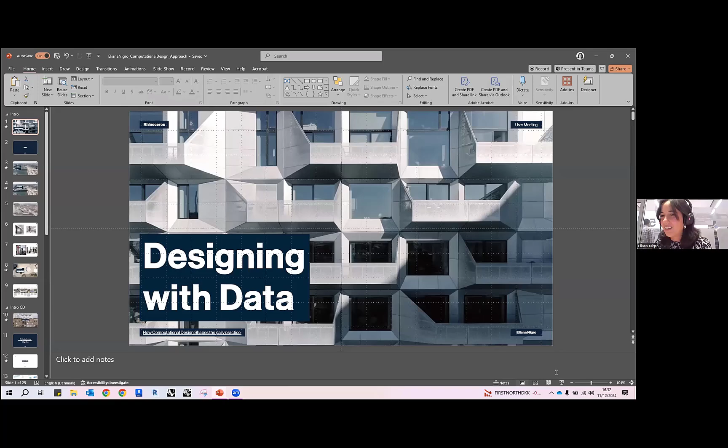All right, perfect. So you can already see, you have already a bit of a spoiler. Just let me know if you can see my screen. Is it okay? Yeah? Yes, okay, not perfect, maximize, but yeah, now it's okay, perfect, great. Here we go. Thank you.

Okay, so you already said something about me, so that's great. And today we are going to talk about designing with the data.

But before diving into the nerdy stuff, I want to tell you just a tiny bit about who Cobe is, because part of the digital approach is actually reflecting what we believe in, what our values are. So, who Cobe is in a few numbers, and I promise this is going to be very short.

We are an international hub of around 170 people. The company is quite young, born in 2006. But despite that, we work all over the world in different scales, and our built projects are in more than 10 different countries. We are located, as you can see down there, in Copenhagen, more specifically in Nordhavn.

This is a place that is very close to our heart since we designed this entire part of the city. So we can say that we are in a one-to-one laboratory. We are literally on a construction site, and around us there are so many spin-off projects that we made. Some of them are quite famous, like the silo.

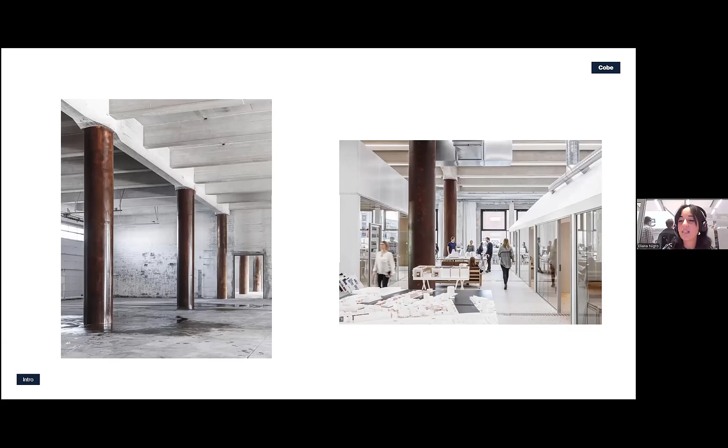So here you can understand that when we work in any context, we want to be respectful. We want to be rooted in that reality, but at the same time, bring something different in. For example, at our office we have a cafe, and you wonder, why are you talking about a cafe? I'm not sponsoring that, we don't get money for that. It's just to say that we want every time, even if it's just an intimate private office, to have the public come in, to create an attractor and to really create the change.

We don't work only with architecture, we work also with urbanism and landscape. And if you look at our portfolio, it's actually much wider.

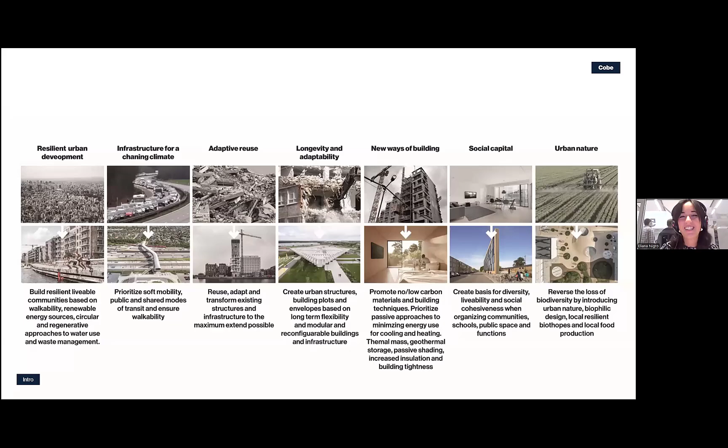So we also do infrastructure, for example, a lot of bridges and stuff like that. And going closer to computational design, we want to be future proof. We want our designs to be long lasting, durable. And if you think of working in a smart way with scripts, what's a better future proof workflow?

I mean, you are basically reusing some parts and working faster, efficiently. I'm going to show you some of these things. So here at Cobe, as I said, I'm the head of computational design. That means I am doing all the planning, development, integration, and knowledge sharing of computational methods.

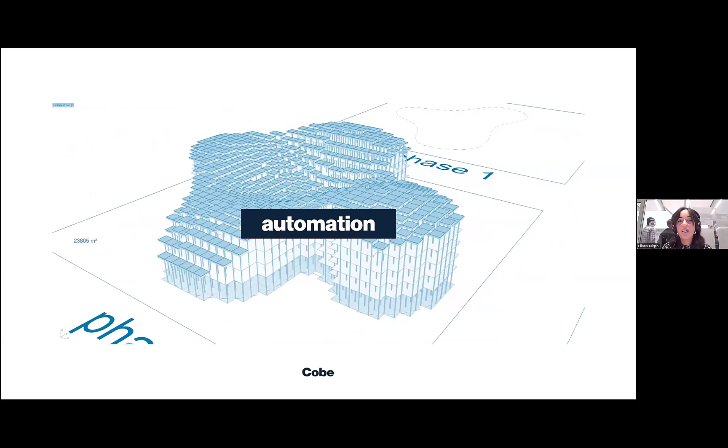One thing that we truly focus on is automation. We want to remove as much as possible all the repetitive, machine-like tasks. We don't want to sit and do a lot of heavy clicks, but we want designers to do what they can do best, which is focusing on creativity, on strategy, and truly coming out with the best solution possible.

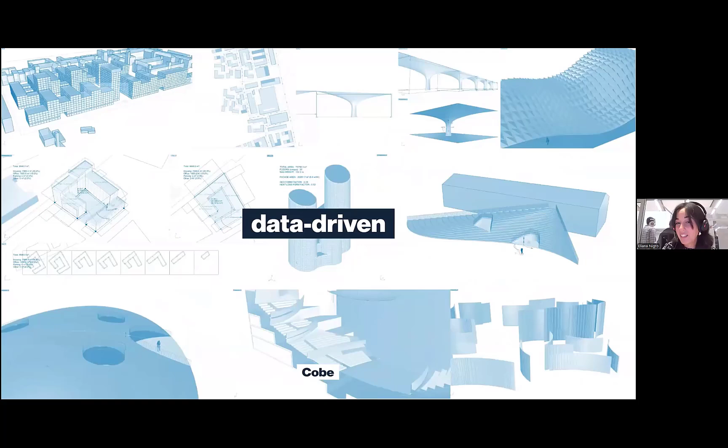Of course, it's not just about repetition, but even more importantly, about understanding what we are doing. So every time we work, doesn't matter what it is, doesn't matter the scale, we extract the information we need. We make sure we are on target for our clients, but also, and even more importantly, that we are meeting our sustainability goals.

So we constantly look at the qualities, the aesthetics, but also at the quantities. That's so powerful, because when you communicate with numbers, the guesswork gets out of the equation. That means that even if we work across different disciplines and don't have a unified style, we have a large portion of tools that can help us with, for example, simulations.

Like in this case, we are looking at the sunlight analysis with Ladybug. Doing all these things actually allows you to be a bit more certain about what you are coming out with, about your ideas. You can truly, in this way, make sure that you're leaving a positive mark on society.

And what we do here at Cobe with computational methods is always making sure that our tools are very intuitive. So we build interfaces. I don't mind sometimes sitting with the people and actually understanding the way they want to work, the way they get creative, because the tools should truly reflect that. So sometimes we change the inputs or the interface so people can feel comfortable.

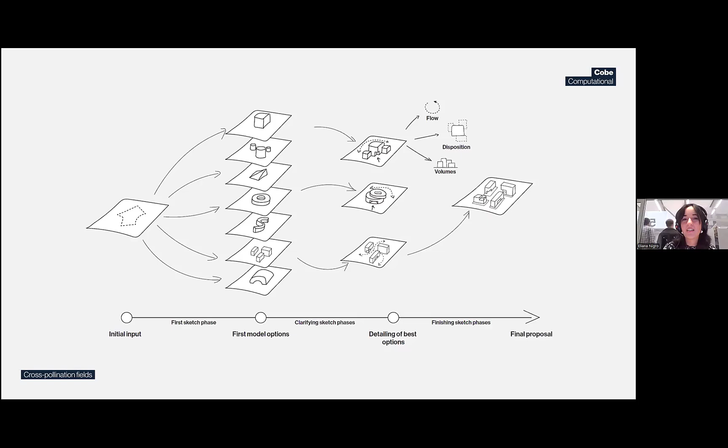I just want to say, in a small parenthesis, that even if I'm so much in the digital process, I do believe, and Cobe believes, that the physical world is equally important. So we do a lot of models and we bring them into the room. We look at it as a team. And we can cut it and glue it back together.

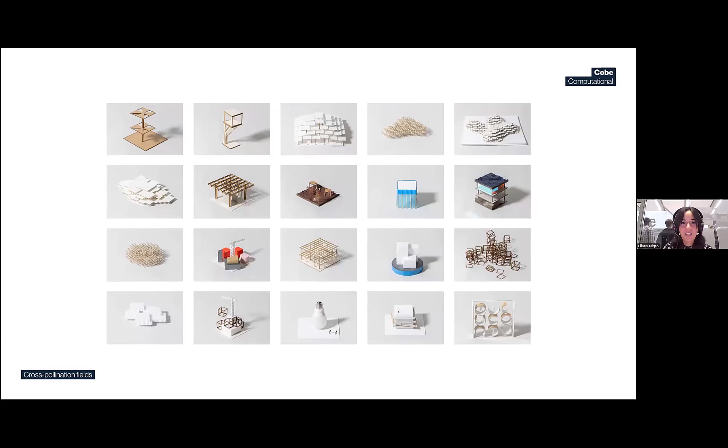And that's quite interesting to see. It's a different way of being creative. And then we can take that knowledge and build a new 3D model.

We also explore AI solutions. We also believe that some solutions out there are actually very good to spark new ideas or to test out some design solutions a bit more quickly.

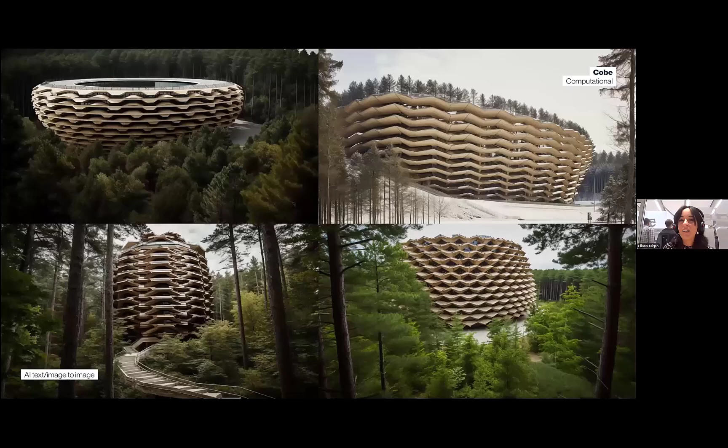We are actually very open-minded, and we do know that the toolbox of the architect at the moment is ever changing. And we are integrating AI also for expressing some abstract concepts a bit more clearly.

So just to say that what you are going to look at today is just a tiny part of what we are doing. Now I'm going to switch to this other presentation, because we are going to dive specifically into one project. I'm actually doing something I think quite unusual, because I'm not presenting a sexy, complex shape. I'm going for urbanism. I decided to present a project I love very much. We won it recently, very proud of it.

It's located in Hamburg. It is actually an entire district by the park that combines different functions. I will not dive into anything related to the design, but we have a fantastic website you can check out.

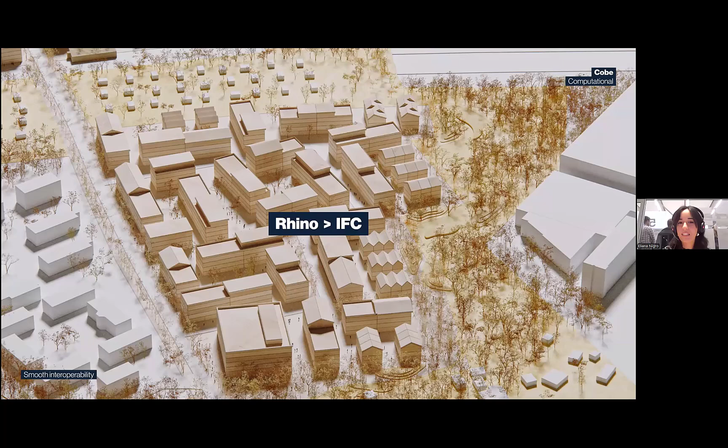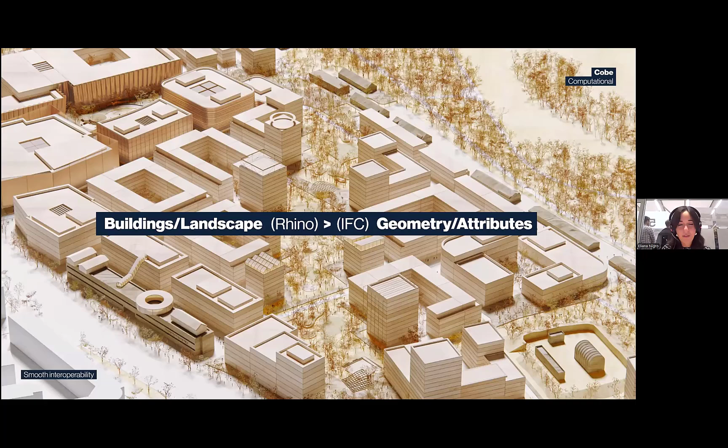I'm just going to talk about the BIM challenge that we faced for this project. Since the very beginning, with the first phase of the competition, the client wanted us to deliver IFC models that were incredibly detailed. So in this case, we are working not only with buildings, but also with the landscape. And the IFC is not just made of dumb geometries, but all of them are proper BIM geometries with a lot of attributes attached.

So how do you nail that in a very limited time and with such a scale? We are talking about 55 hectares of terrain to design and 630 more thousand square meters of buildings. Just to make it a bit more clear, we have more than 300 unique buildings. That's a lot to design, to think about, and even to deliver with such precision.

To make you grasp the amount of quantities that we needed to extract, you can look at this. This is the Excel that comes out of our IFC. So there is truly a lot going on.

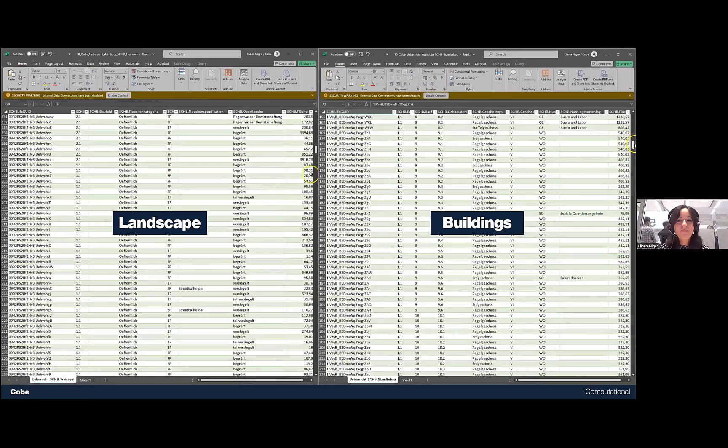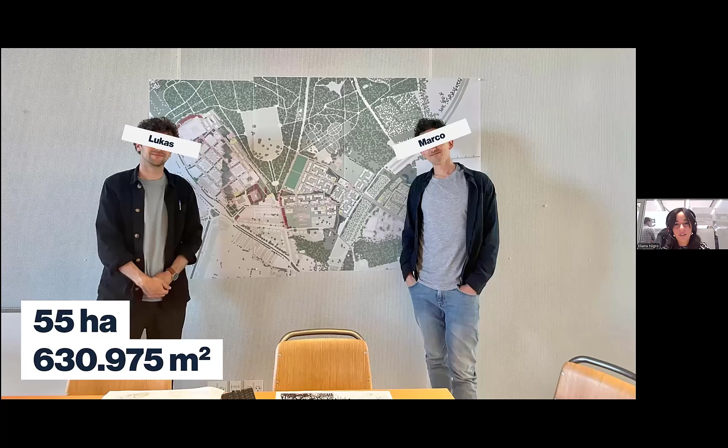This, I have to say, wasn't just thanks to computational design, but also the fact that there was amazing teamwork. We were quite a tight team when we started, and we truly, since the very beginning, talked about what made people comfortable, how they wanted to work, what the inputs should be. Therefore, they could focus on creativity and we could handle the very last part, the digital delivery, just in the last few days. So how did we do that for something so large?

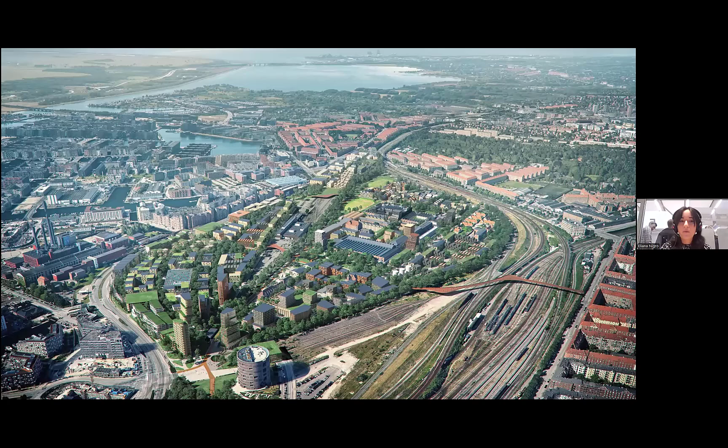I want to make a small parenthesis again, just to say that we work very often with these numbers. This, on the right, is Jernbanebyen, another very famous project of ours, a district in Copenhagen. It has even a higher density. So we are used to dealing with this scale.

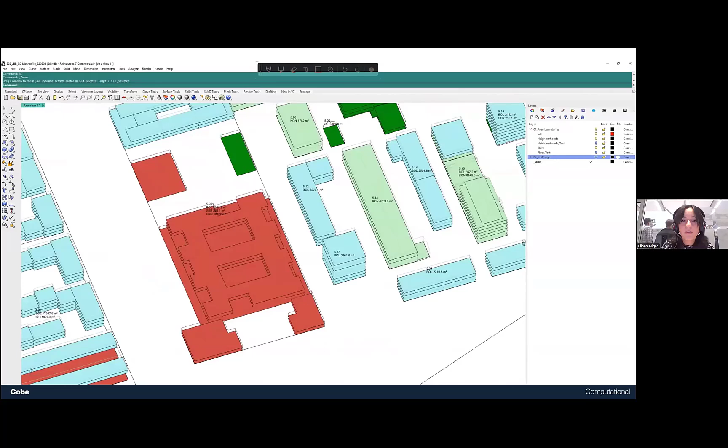Every time we work in real time, we need to know the quantities. For example, in this case, you can see, and this is just something super simple, it's just areas by function, but it is important for us to know what is the amount by neighborhood or by plot. So we are used to having this information on our screen.

So even if we are working with just one building, very simple, we can just feel free to play around. And even if we do drastic mass modification, we can immediately see what that means and if we are on target. Even more interesting, we can see if we are out of a certain envelope. We can do the famous one-to-one projection of the facade down in real time, and we can do all the floor plates.

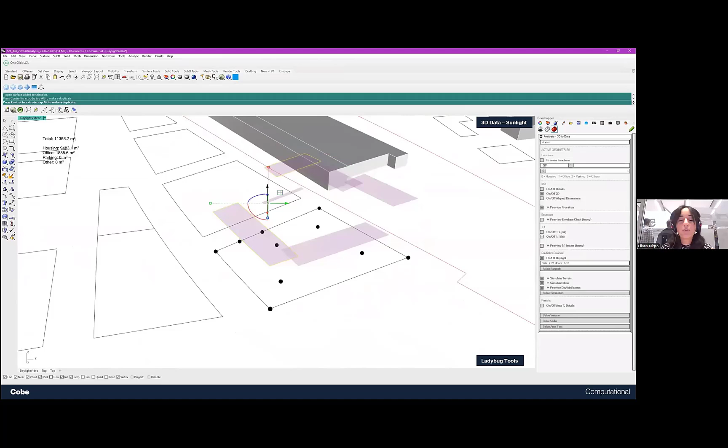What I love the most is that you can, within the same script, integrate also simulations. So while you are working, you are able to see, for example, am I creating shadow in the courtyard? And where is that? And if I do this, what happens? You're able to evaluate, and in a very simple way, just move in the best direction possible, and also justify to our client why you took a certain decision, why a certain shape is better than another.

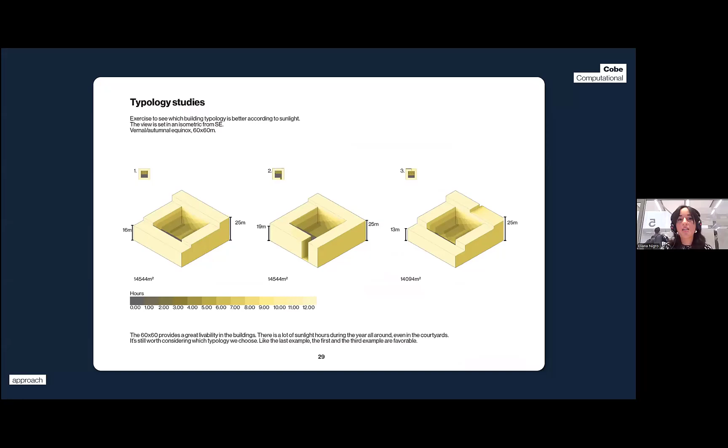We also use these methods to do some generative design. So sometimes we run optimization just to ask algorithms to give us some guidelines. But we usually prefer a hybrid approach.

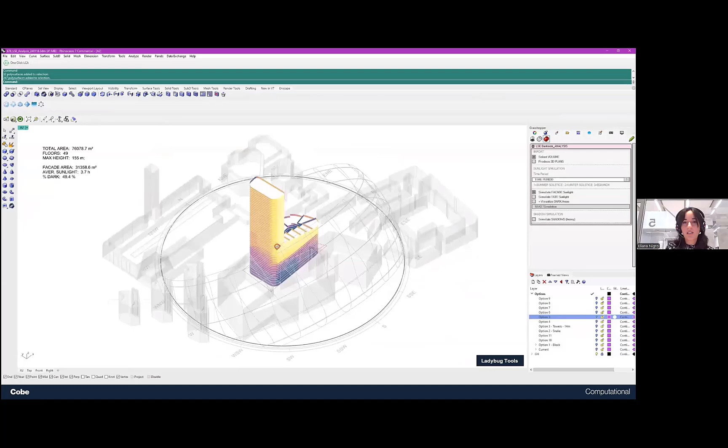So we usually do our massings in Rhino, so everyone can do that freely. And we have scripts that run in the background that give you information regarding the geometry itself. Like in this case, you can see total area, floor, maximum height, but you can also see dark areas or average sunlight. And you can see that we always integrate the context, because we want to be respectful towards the public spaces, towards our neighbors. That's very important to us.

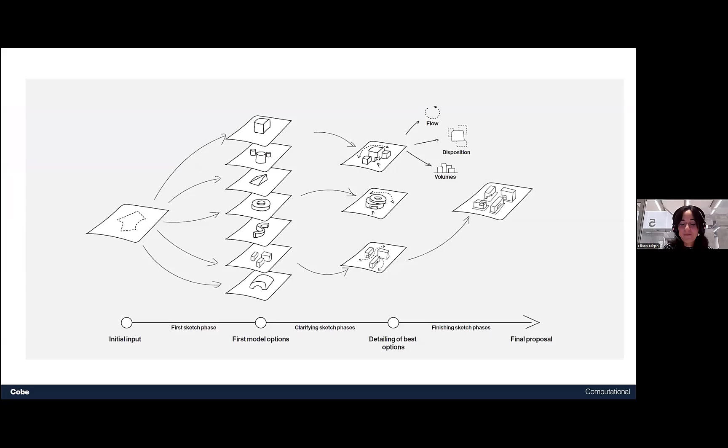So we wanted all of that for this gigantic project. And we didn't want to worry about doing an IFC model at the end, so we wanted that intelligent flexibility. We wanted to make sure to have clever solutions and optimize right from the start.

There was a clash between the flexibility we wanted and the precision of those IFC models. We know from some of our competitors that they had to stop a month earlier and spend an entire month with a full team of brains to produce these detailed BIM models. Instead, we decided to do something different, so we used machines to do this process.

Then our designers could go out, meet with the city, meet with the people that are going to actually inhabit those spaces, take notes, and change the design accordingly. It's extremely important that we utilize the right technology to make the best decision possible, otherwise sometimes we don't have the time. So there was this digital dilemma.

As I said, we met as a team and decided we wanted to save resources. We wanted to automate as many repetitive tasks as possible. On the other side, we wanted smart flexibility, so we wanted these scripts to run in the background and always tell us the important quantities. And we wanted all of this to be easy to use.

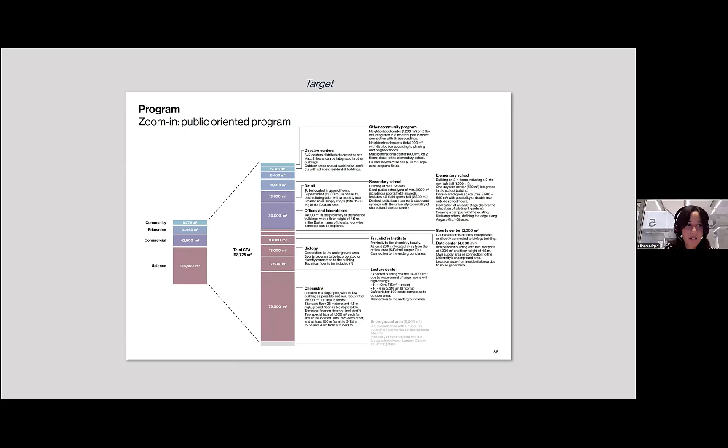If you look at the breakdown, it's insane. It's not just about square meters, it's about footprints, floor to floor heights, amount of floors, and so much more. So let's dive right into it.

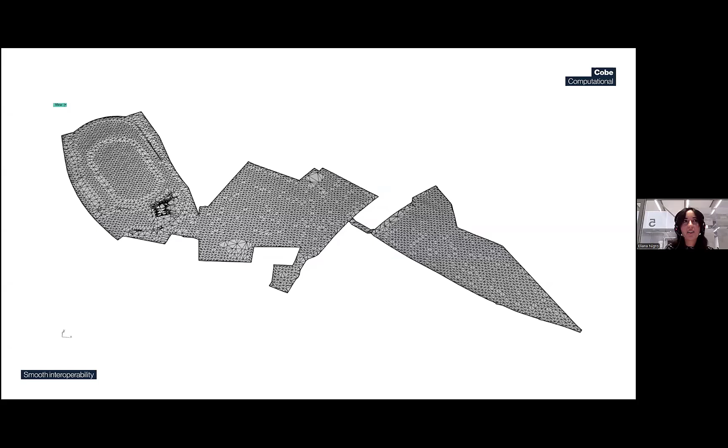Going closer to it, to the first IFC, I want to start with my favorite and also the easiest, which is the landscape and the topography. The client was great, they actually provided us some detailed IFC models, for example of the existing terrain. So immediately we met as a team and could analyze how the terrain would work.

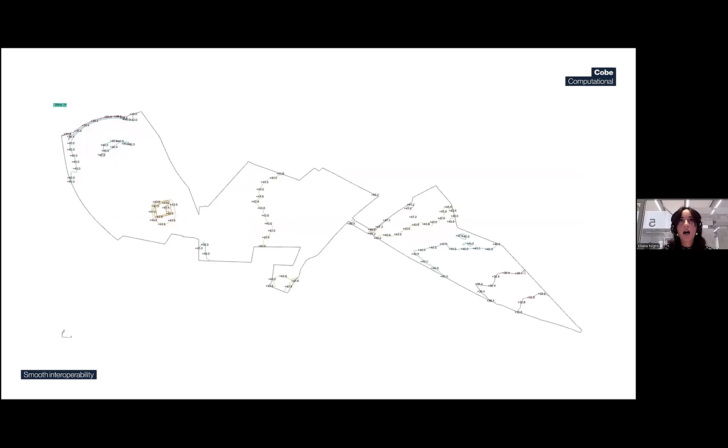So what are the contour curves? What are the different heights? You wonder why that's important, why do you need to look at the different heights, why do you need to look at the slope? Again, we're a team with different expertise, so what's clear to a landscape architect just by looking at numbers might not be clear for an architect.

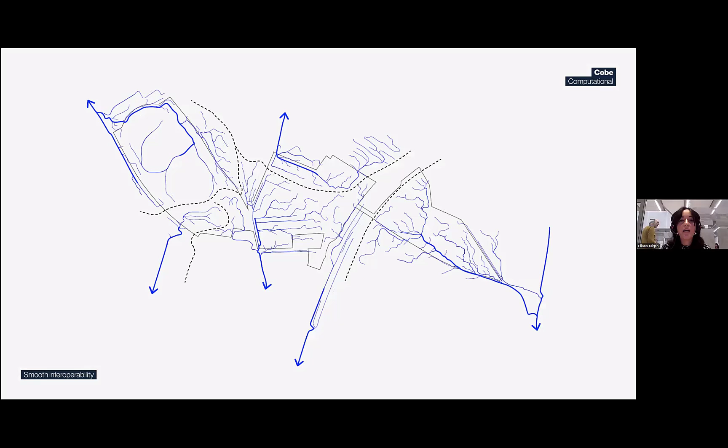So this is a very simple coloring of meshes, and it's very useful. We can immediately tell which areas are quite difficult, maybe how we should orient our buildings, and also how the water is flowing. If you know how the water moves, then you can think of what would make sense as a green corridor, and then understand how your streets should go. That's already informing your design choices, already creating some sort of infrastructure for you.

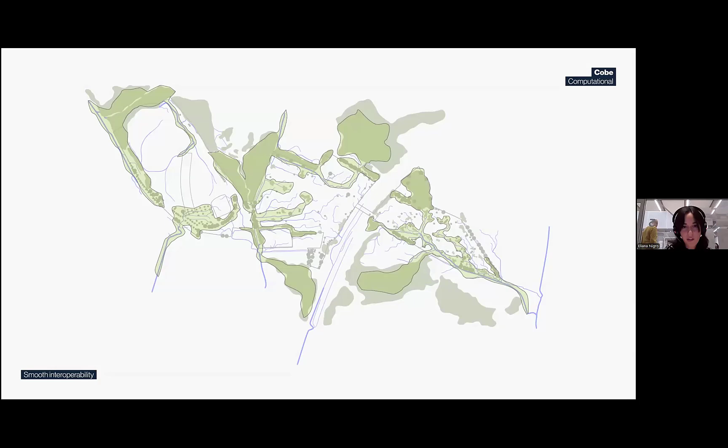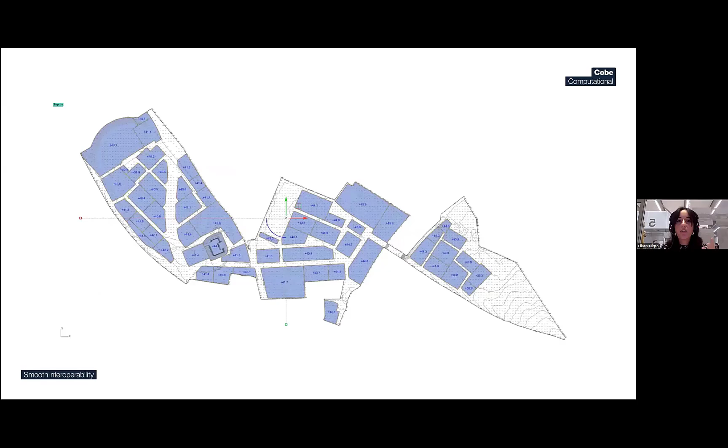Since we were all on board with knowing all this information, we created a script that could allow us to change the terrain very, very quickly. Let me run this again. Here it is, the original terrain. Here it gets modified, and again optimized when looking at the floor plate of the buildings. Okay, let me phrase that again, much better.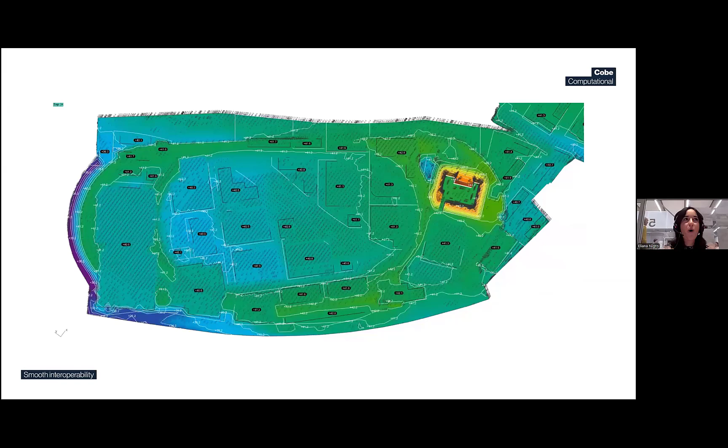Basically what we did, since we were always changing the shape of the plots and the location of the buildings, we created a script that could allow us to plug in any sort of shape for our buildings and understand what would be the best location for them on the terrain, creating a flat surface underneath those buildings so the terrain modifications would be as little as possible. This way we could also save in terms of sustainability, because it takes energy to move terrain and so on and so forth.

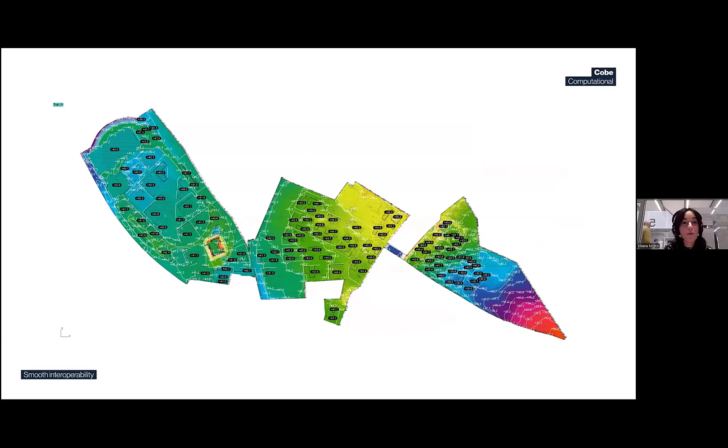Of course, this again was teamwork and a lot of thought in terms of landscape and buildings. The easiest part, honestly, is transitioning from Rhino to Revit at topography. Whoever works with Rhino Inside knows it's just one component.

So if you have a good mesh, it is very simple to bring it through. And we do that in many projects.

This is another project of ours. You can see that the terrain is quite detailed, and to bring that into Revit is very simple. What is not easy is actually all the other attributes.

But just to say that we had an easy time with the topography, also because we work as an office a lot on landscape. So we are... oh, something bad is happening.

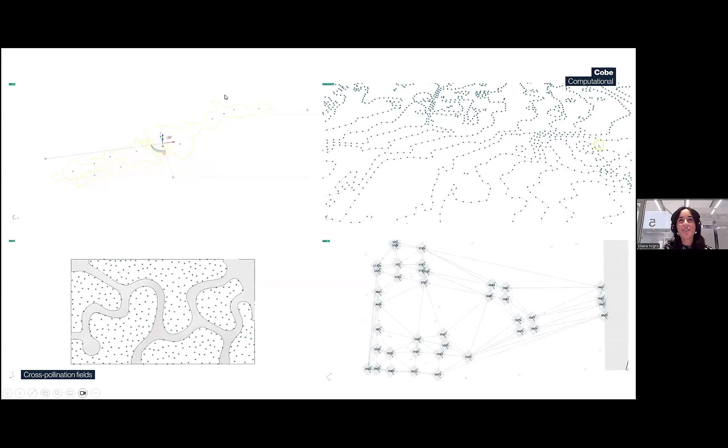Let me restart. Okay, finally we can see it. So as an office, we are used to doing terrain manipulation, starting from different inputs.

In the case of Volkspark, it was a mesh, sometimes some quotes and the buildings. In other cases it's points in space, it's quotes. It's really different according to what makes the most sense.

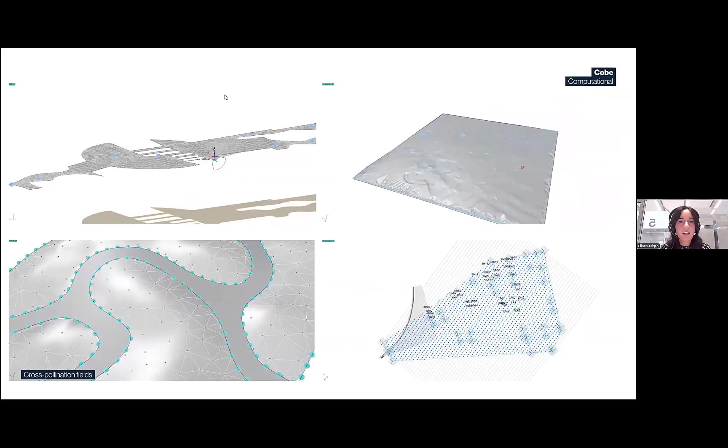But what we care about is, again, keeping the terrain flexible and not having to worry about modeling in 3D, and actually having all the instances related to the terrain just follow, such as the trees or the buildings.

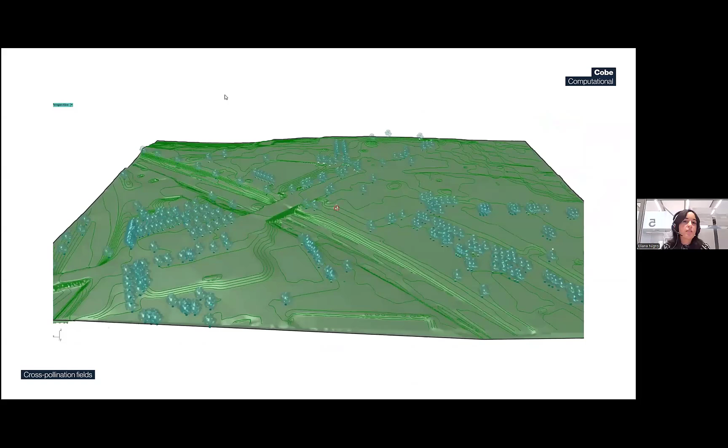So we could just focus on making the good strategies, and then we didn't have to worry about modeling the topography or placing the trees on the terrain or projecting the buildings.

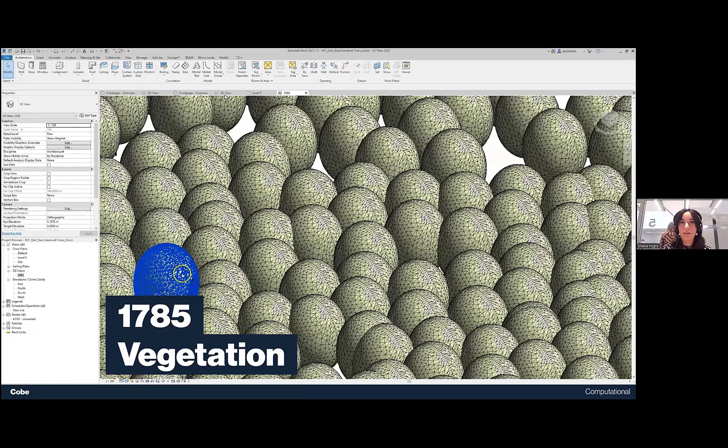About the vegetation, the client also provided us with a lot of trees, and all of them coming from an IFC model had a lot of properties attached.

As a team, we thought it wasn't very comfortable to work with these in 3D. So what we did was move all of them into Rhino, and we actually decided to translate those into 2D blocks.

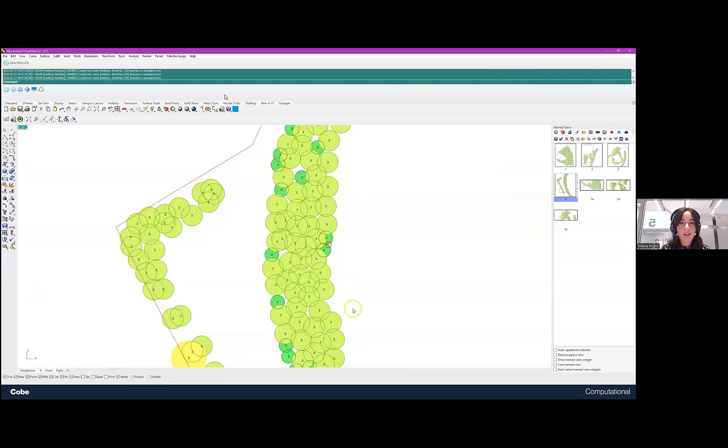And the 2D blocks would just carry some of the most important properties, such as the radius of the canopy, because it was important to us to count the amount of trees according to each category, each size.

So also the landscape architects could have that information in their hands, also because we had targets for that too. So it was important to have also this information out and nail it down, again, in a super simple way.

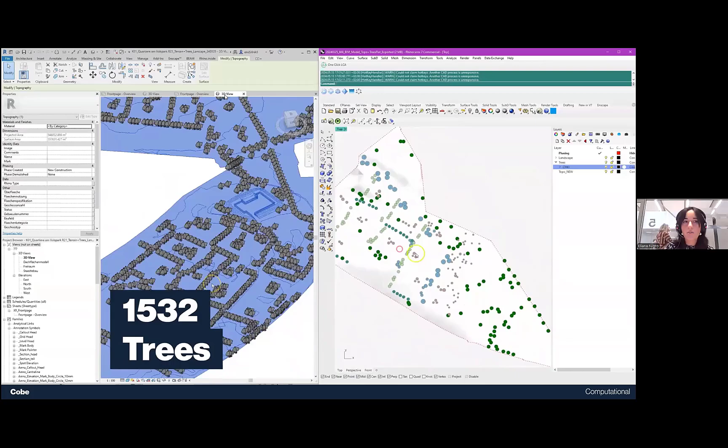Because again, the topography just comes out in a click. And then as soon as you move your 2D blocks around in Rhino, they will just be changed automatically in your synchronized Revit version. But there is much more than terrain and trees.

I mean, there is a proper landscape design. Design like this, very, very precise. And we wanted to reach the same level that we usually do in other competitions.

So we actually were able to detail a lot, and it is, again, very fast to transfer the geometries through. What is not easy is to attach all the attributes we needed.

To understand what kind of attributes and information the client wanted from us, you need to know that there are different phases, different neighborhoods, different plots.

And if you think of the landscape, then you have different levels of permeability, different materials, different categories, subcategories, functions, so on and so forth.

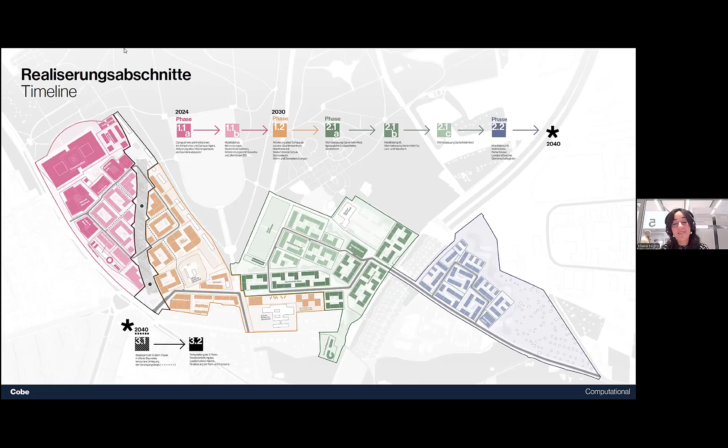A lot of things for just one tiny piece of land. I mean, each of these tiny pieces. So this is a very rough snip that I took while we were working on our first days.

So here you can see, among others, some of the data that we had to fill in. So it is easy to bring the geometries through, but then it is not easy to actually give this information.

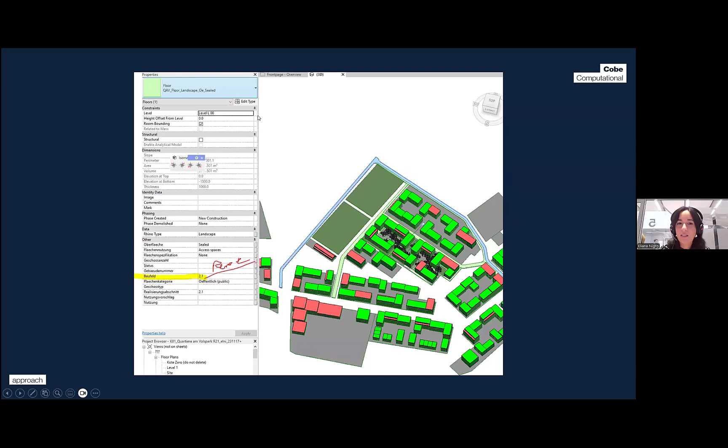We needed to assign the right material, and again, permeability, the function, and this is work in progress, as you can see, so we didn't have all of them yet.

If you think of doing this work manually, we are talking about thousands and thousands and thousands of these tiny geometries. So think of having a person selecting them and doing that work manually - it's just insane.

It takes a long time. And also a person can do that job wrong, because you can get confused and just type the wrong, for example, the wrong value in.

And the worst part is that this type of workflow is not flexible. So it takes so long that you don't have the time to change.

So what we decided was that the landscape architect would focus on just designing, and then all the attributes and geometries would come by itself. This is the machine that is behind it. I work a lot with data trees, so everything you see here is actually necessary.

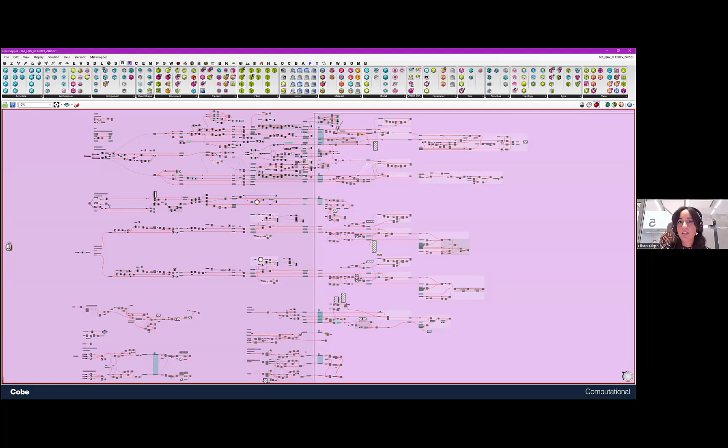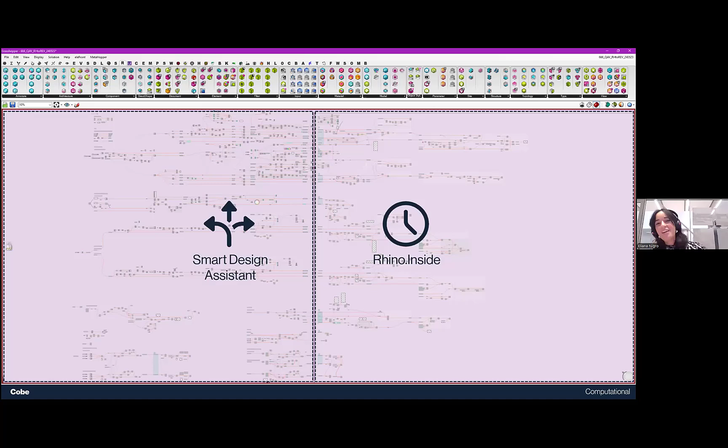Nothing is repeated. On one side we have everything allowing us that smart flexibility, being able to read all the data to make sure we are on target. Then we take this data and transfer it into Revit with Rhino Inside. It just takes seconds, even for 55 hectares, a second against a month of a team working full-time on such a task.

Why should we put people on doing something that can be automated? That's like a huge waste of talent.

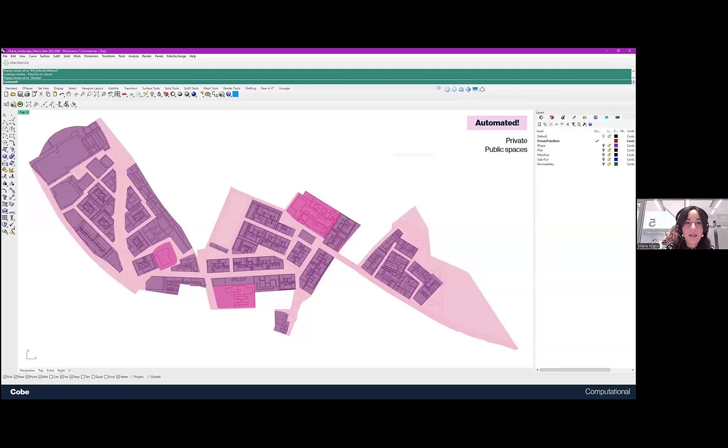So this is, for example, how our Rhino would look like. All the colors would be for the different functions. As a designer, you need to choose what function you want, but then all the rest would come by itself. The script very easily would understand which phase that piece would belong to, whether it is private or public, and if private, to which plot it belongs.

So we could save time on all these things and just feel free to modify stuff as many times as we want. And if we look at the buildings, it is much more complex than that.

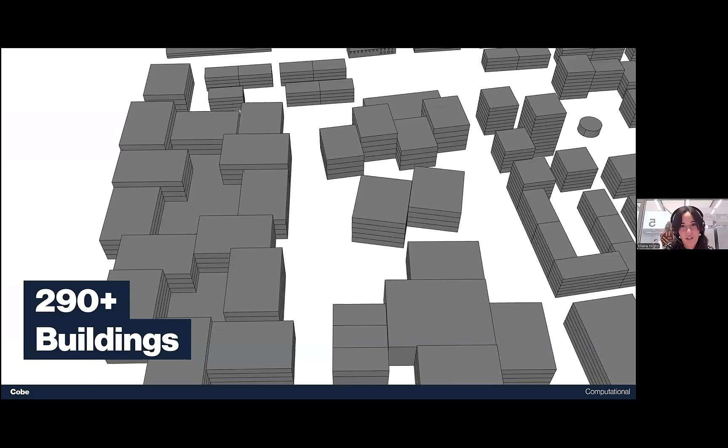You can see that we actually got to an extremely high level for the buildings, because we could also focus on their facade expression, for example. Just by looking at their volumes, we tested many, many things out. So here you see just one of our options, and just one building.

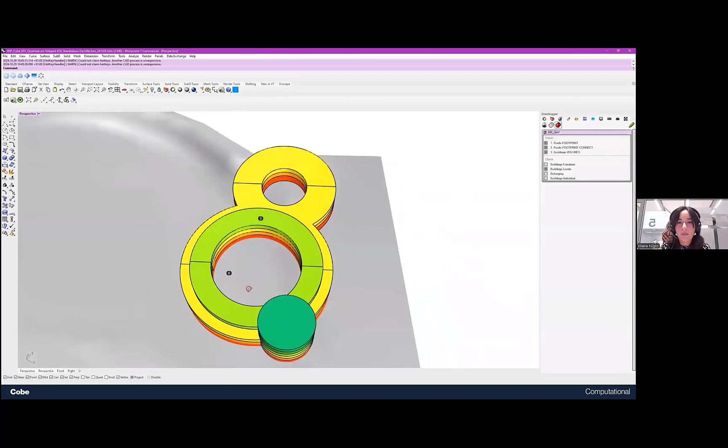So you can see the first part of the script in action. We are able to read the layers super easily, then we are able to read all the different floors, even if located on the terrain, because the client wanted us to specify the different levels. Then we can understand to which plot it belongs, and everything else I already mentioned.

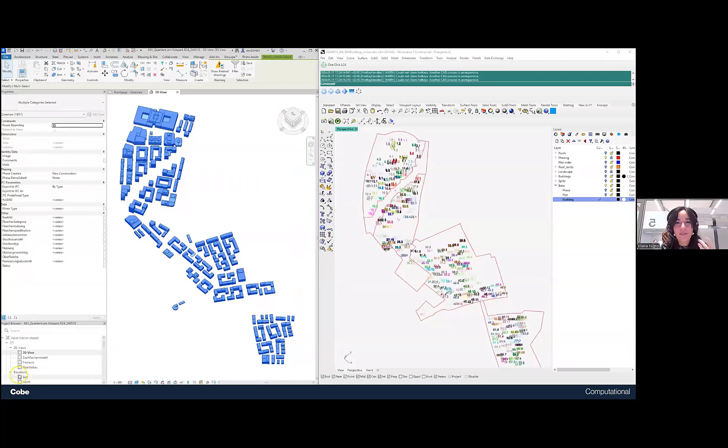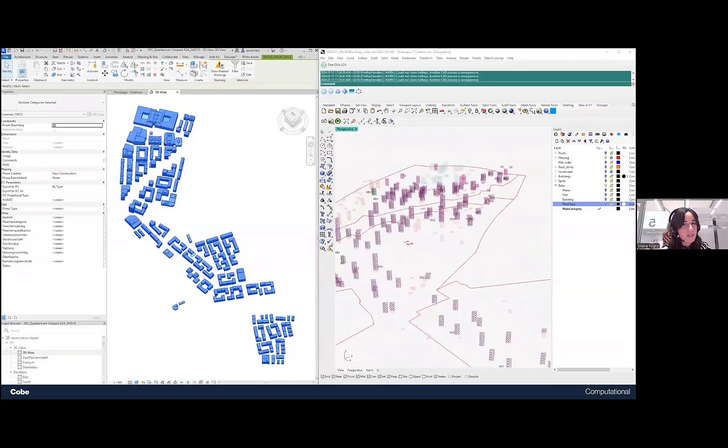So if we look at our generated Revit, you can see here we are querying the attributes with Rhino Inside. We can read all these 10 attributes for each of these geometries and verify that they are assigned correctly. For example, we also needed to specify all those unique 300 buildings.

This is, for example, how it looks with all the slabs, all the walls, all the roofs. You can see that for each of the geometries, all the data are assigned. And those buildings are placed on the topography.

So think of the landscape team working, the urban team working, and then having to place these buildings correctly on the terrain. Of course, that was also automated.

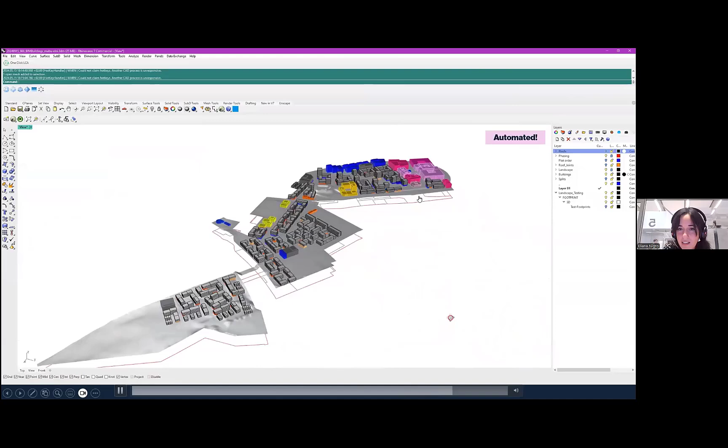So in a click, you would modify the topography, and also all the newest buildings would be placed on the terrain. We would have the same layer structure. Then at the bottom, we have some guidelines for the phases and the plots. So when we do that, also in Revit, all the levels are automatically generated.

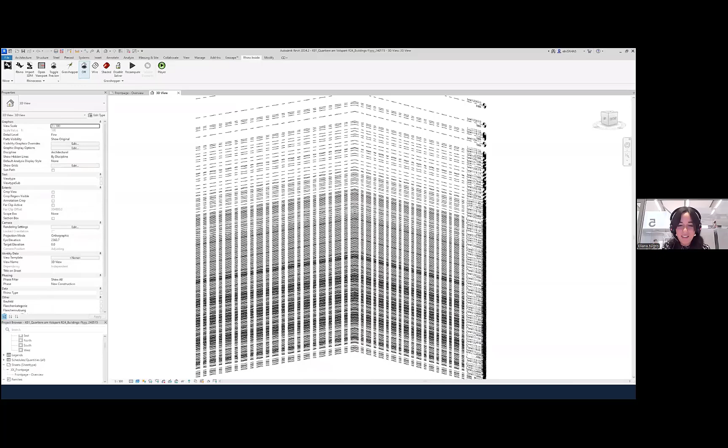The client had a lot of specifications on how they wanted things to be modeled, all the slabs supposed to be on the correct level, then named according to the specific building, the plot, and the phase. So it was actually a lot of work, and extremely convenient to have a machine running all of that for us.

And of course, we don't trust machines 100%, so we also created some other scripts to make sure we could visualize those parameters. So again, querying all the parameters and making sure, if you're not a Grasshopper expert, that everything is perfectly aligned.

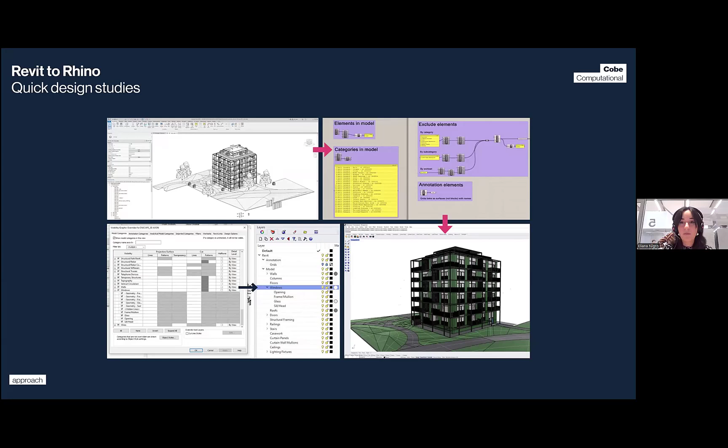We had a lot of automation when it comes to visualization by parameter, both in Rhino and in Revit. We move between Rhino and Revit very often, especially when we want to do design studies, because it is much more comfortable for us. We find it much more dynamic and flexible, so we actually use the scripts a lot to just go back and forth.

We reached a very high level of detail for this project, so we have scripts that enable us to go from just a volume to a facade, auto-generating blocks around the volumes. It is comfortable for us to go back and forth because these simple volumes can be easily brought into reality as physical models, but they can also be used for simulations.

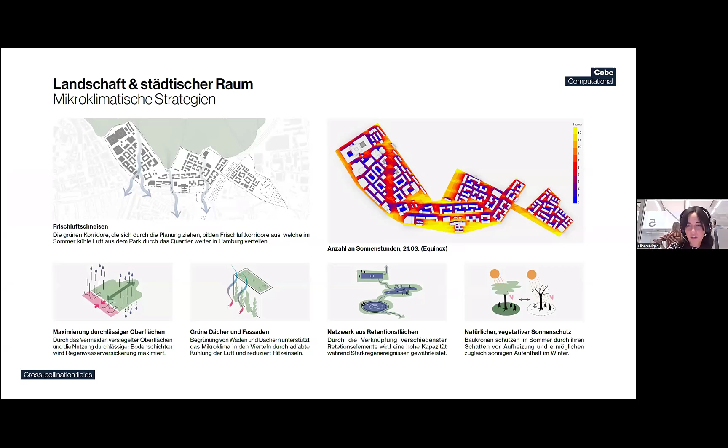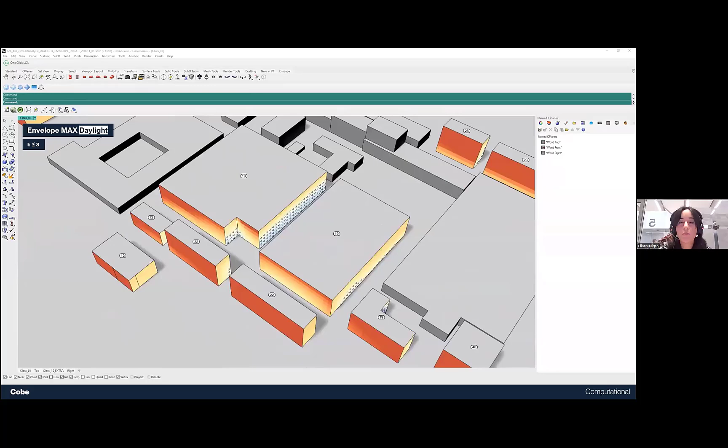When we think of simulations, there were requirements for that - the client wanted us to think of the microclimate strategy, so we did a lot of simulations. If we look again at Jernbanebyen, the project I mentioned before, it's more or less the same size, and we were constantly analyzing how the facade would receive light, because we needed to make sure we wouldn't have apartments that wouldn't receive any direct light.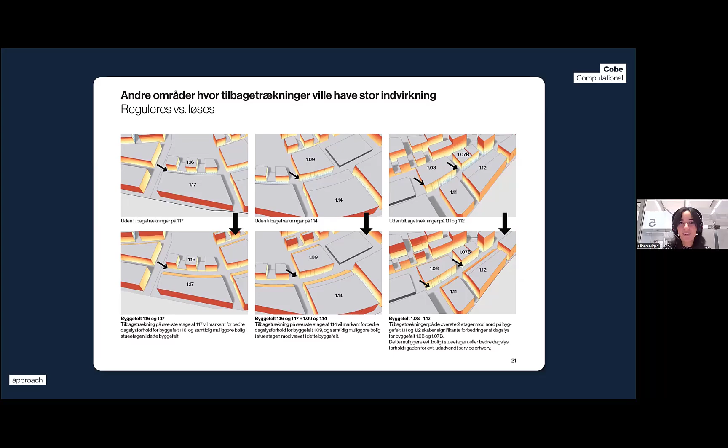Very early on, in the early phases, even if we are doing an urban vision, we need to set the things right. We need to set the right constraints for people to then have the best indoor and outdoor conditions. We don't look only at the sun, we also run many other simulations at the same time.

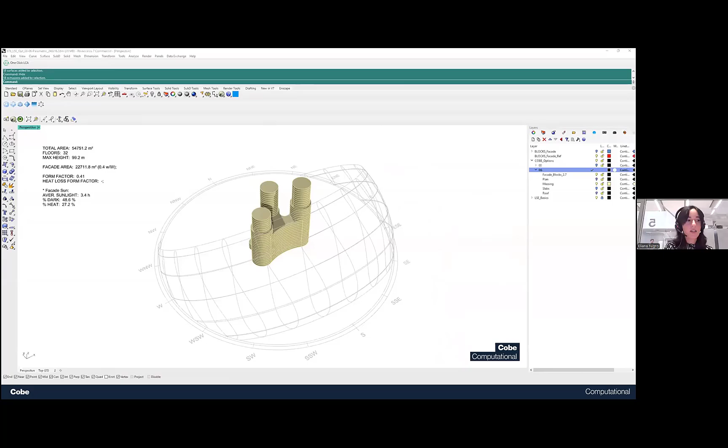For example, in this case we are back to that tower we were looking at the beginning - this is a project in London. As before, you could see area, floors, maximum height, and everything related to sunlight. We also analyze the view to a specific attractor or the view to the sky, and we utilize that data not only to shape our buildings and decide which massing would work best, but also for the envelopes.

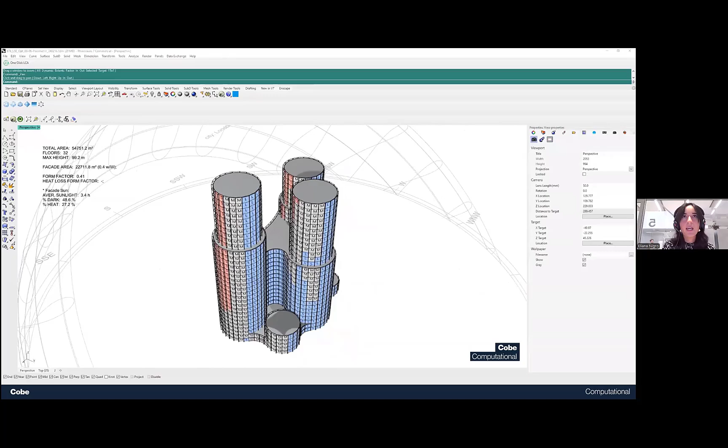We use that information to standardize the facade and create different facade panels according to what is needed. This is a strategy we've been using for a decade, and it's been out there in the parametric world for very long. So it is not new, but we do that very often, even if we are just looking at the large scale and not something as detailed as one building.

We look simultaneously at the outside and the inside. When I said a decade - if you think about Tip of Redmolen, this is a competition from 2015 that was recently finished, the concept is the same. You have the facade basically following the sun path. In this case you don't have so much context around, so it was easier to standardize.

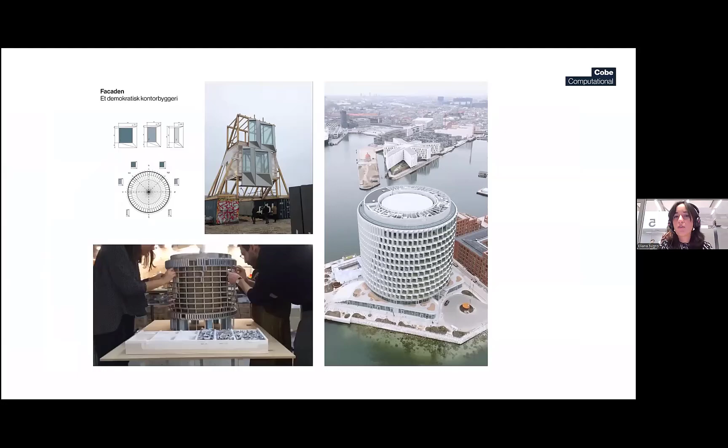Standardizing is also important when you think of fabrication, so we try to do that as early as possible. Standardizing also means that when we are dealing with more unconventional shapes, we actually try to simplify that.

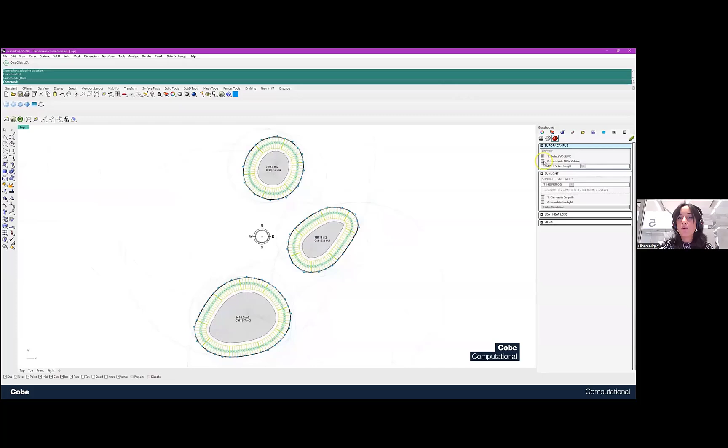Like in this case, this is a project called Europa Campus. We were making sure that each of the elements would be a perfect arch, a perfect piece of a circle, so that we could control it much better, both for the structure and the facade. And when we do that, it's also because we want to look at the interior.

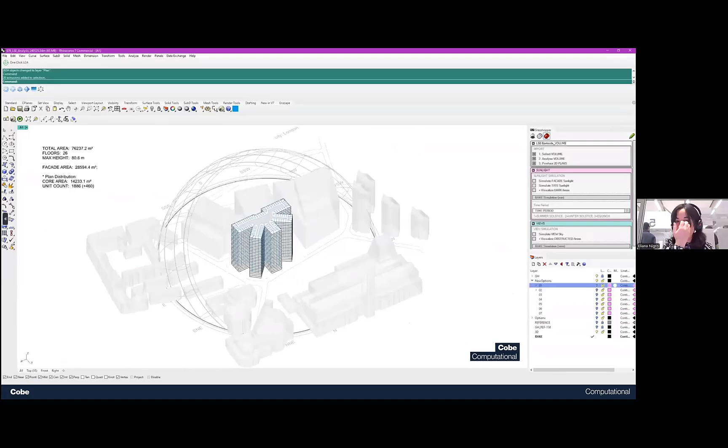Here we are able to visualize all the residential units inside - this was a building for students, so those units are well set with a certain amount of square meters. These units inside were auto-generated, and we could immediately understand how many we would have, if we were meeting that target, and also which areas would be wasted or dark, where it would be better to locate the core.

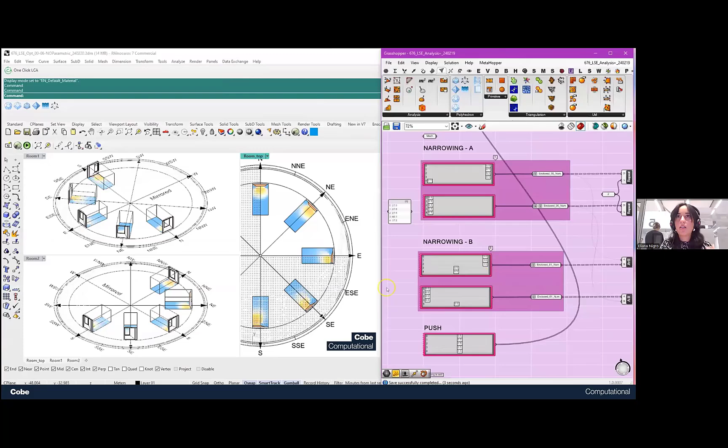It is also easier to grasp if a certain decision is actually meeting our targets, and if it makes sense, and how to change it. As I said, when we do that it's also because we can then easily generate rooms and run daylight simulations for the interior, understanding if the facade we want to create is actually working internally as well.

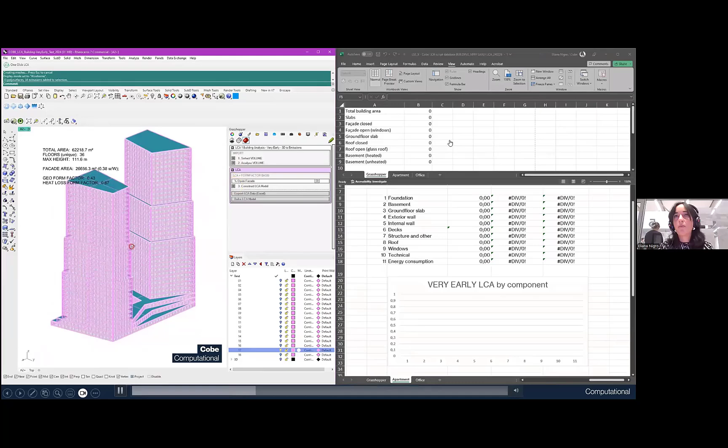Really a lot of data kept in consideration. For example, in this case, we are looking at the carbon footprint. So we actually have, in this case, not a complex script, but a very complex Excel that our head of sustainability built with plenty of data.

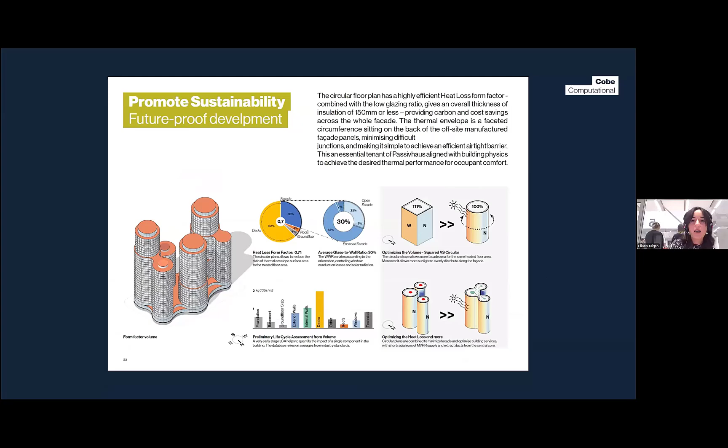Here you can see just a tiny bit of that. But what we do is we utilize Grasshopper to auto-generate the slabs and a placeholder facade. And then it doesn't matter what the shape is, in just a click, we are able to bring it through Excel and then generate a lot of nice and clear diagrams that can help people communicate with each other.

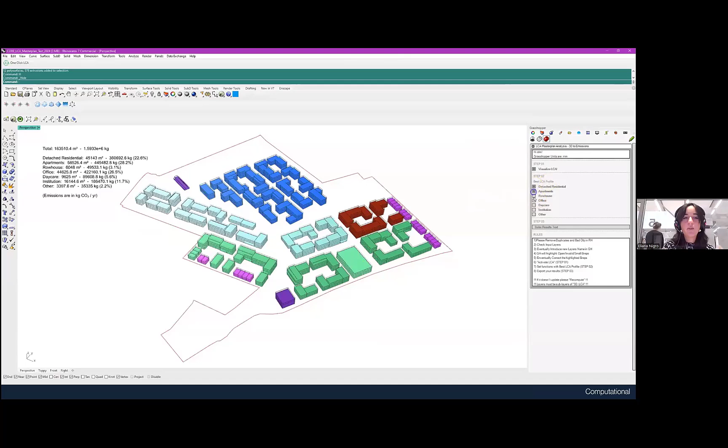And again, we don't work only with architecture. So again, we are tracing back to Volkspark, the project I was presenting. These are buildings on a large scale, and also for that we are able to look into the carbon footprint, and the same for the landscape. This is truly a way, as much as possible and as early as possible, to keep many data in consideration and make sure, especially when we are shaping cities, that we do that as best as we can.

We know and we believe, as an office, that all the big decisions should be taken early on, when we have the most power as designers. So we don't want to just pick materials or work with the small details. If you truly want to fulfill all the goals you have in terms of sustainability, for example, then you should make sure you do that as early as possible.

All right, so I think that's all from my side, and we can maybe take some time for questions. I don't have much time because I'm very soon likely going on Christmas holidays, so I have a lot of external wishes and things to deliver on projects. So let's try to just take a few questions.

Thank you, Eliana. Welcome. The presentation has been great. Many questions and many people saying thanks and very impressed by the presentation.

I'm not sure how to organize the questions because there are so many. I will try to just pick a few of them. For example, the first one was: beside Rhino, what other BIM software applications did you use? You showed Revit, but I'm not sure if maybe you can also complete it with the plugins you use for Grasshopper, because there are also some questions about that.

So I think one thing you need to know is that in Denmark, we have a specialized figure for construction architects. And here at the office, we have a lot of people that work in that phase. They use Revit. So in the early phases, we use Rhino, then we shift into Revit. We are also experiencing lately that we need many times to also look into ArchiCAD, but at the office we don't use it. That's sometimes needed for collaborations, but our favorite is definitely Rhino.

And for transitioning from one to another, we use different solutions, not only Rhino Inside, we also use Speckle. In this specific case, Rhino Inside would work much better because we needed truly a lot of precision, control, and a lot of attributes to attach.